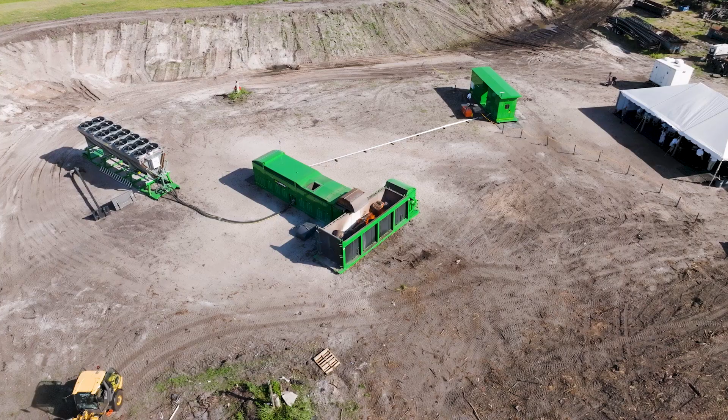So I founded this company 28 years ago, and as you can see by this cute little chart on either side of me, we've got machines on every continent on Earth except Antarctica. Building the BioCharger took a fairly large team. Our serious engineering team, which you'll meet in a little bit. But in addition to that, we have some other collaborators.

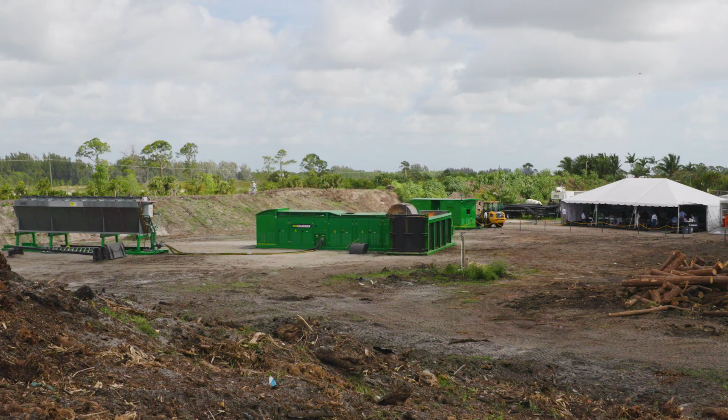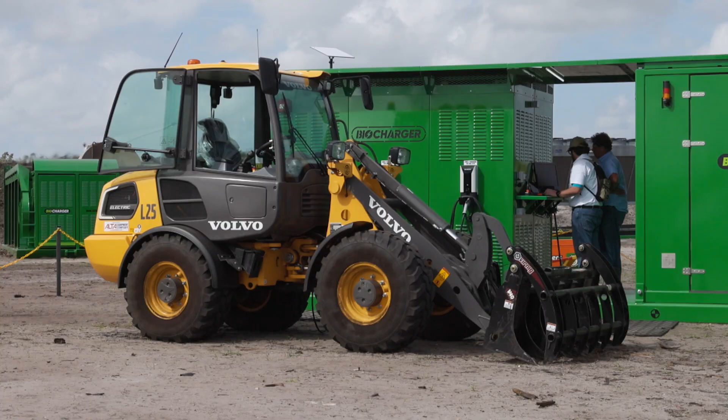We have Rolls-Royce. Rolls-Royce is building the battery for us. We have our friends at ElectraTherm. And ElectraTherm builds our organic Rankine cycle generator, which is really important. And then we've got Volvo, and they are advising us on this whole world of change into electric vehicles.

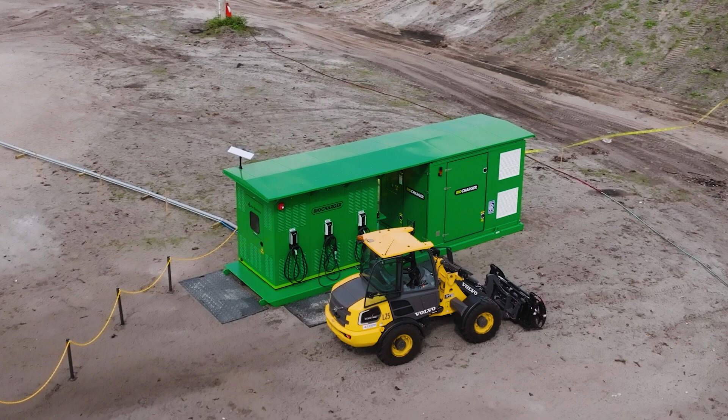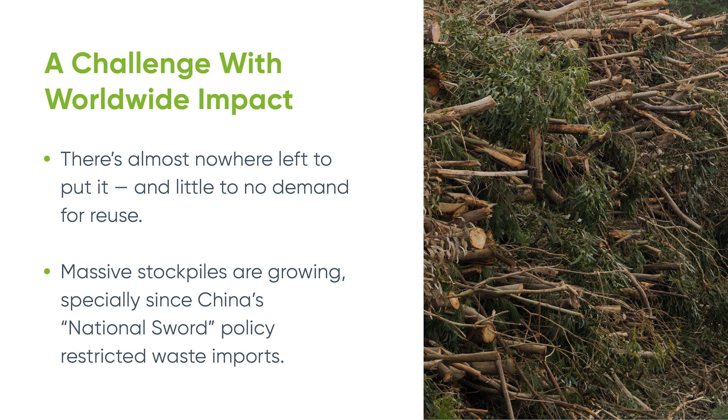You'll see we have the spectacular L25 battery-powered machine that's running out there. You'll notice on the battery storage module, we have the plugins to charge the machine up. It's been here running all week. It's absolutely spectacular. We're going to talk a lot about vegetative waste because that's our business. And it's an important topic because we have huge quantities of it as a waste, and we have no use for it, and we have no place for it.

But the problem is that 50 million tons doesn't include any of the vegetative waste from wildfire mitigation. It doesn't include tree mortality. It doesn't include our waste from our state and national parks. And it doesn't include any agricultural waste like the vineyards as an example, or prunings of trees and all that sort of stuff.

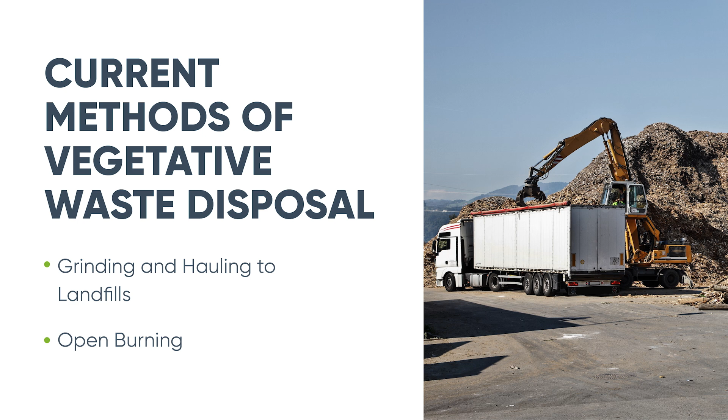We have this across Canada, Mexico, South America, Europe. I mean, you wouldn't believe. It's just absolutely amazing. How is vegetative waste being eliminated today? Primarily, we grind it and we haul it to a landfill, and we also open burn it. The problem with grinding and hauling is that a grinder doesn't eliminate vegetative waste, it just changes the volume, so it makes it easier to throw in a truck, right?

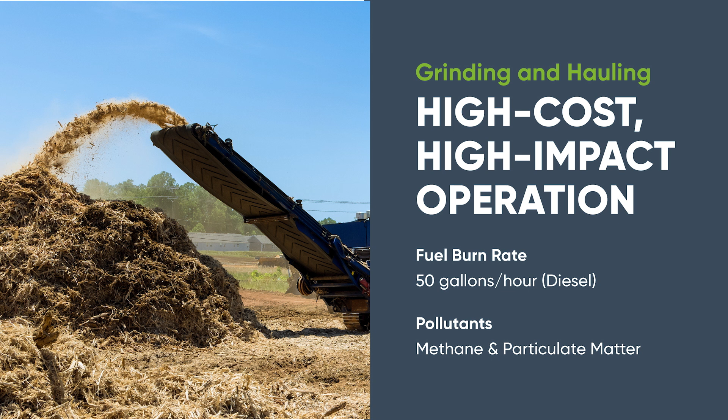But the grinders use anywhere from 50 to 75 gallons of diesel fuel an hour, and on top of that, there's this huge particulate matter release, which is a really important deal. We don't want this particulate matter in our atmosphere. That's the whole point of our machines. But even more important is that raw wood waste, as identified by the US EPA, is a carcinogen. So we have to be really careful.

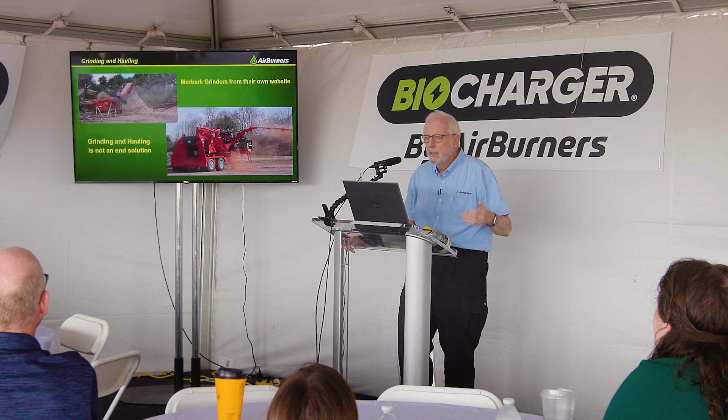I actually think grinders are incredible machines. One of the best companies in the world, I think, and I'm proud they're an American company, is Morbark. They do a beautiful job. They build an incredible machine, but these pictures are off their website. You can see the dust coming off of these machines. There's nothing you can do when you grind this up. You're going to get this light particulate matter, and a lot of this gets past our natural body defenses and gets in our lungs. And of course, that's the stuff that hurts us.

We've got to get back to a healthy forest, that's the whole point. And we're part of doing that. So how do we do that? We use a technology called air curtain technology. So what you see happening out there or in any of our fireboxes is that we're putting a curtain of air over the top of the firebox, and that curtain of air traps the smoke particles as they rise up on the hot gases and they reburn.

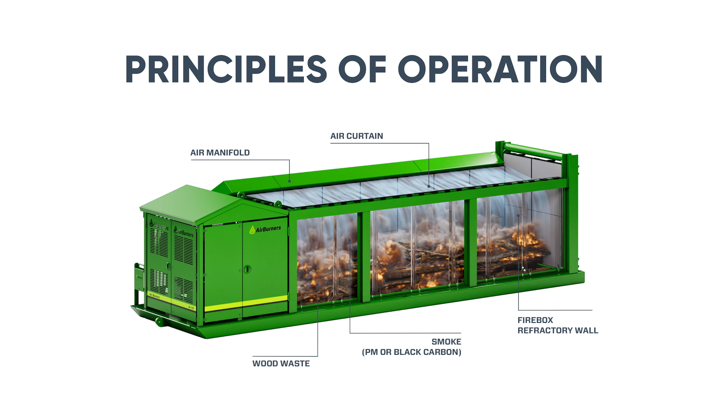So the purpose of an air curtain is to create a secondary burn chamber, basically. So the particles rise up, they stall under the air curtain for fractions of a second. It's the hottest part of the machine. They reburn and then they escape.

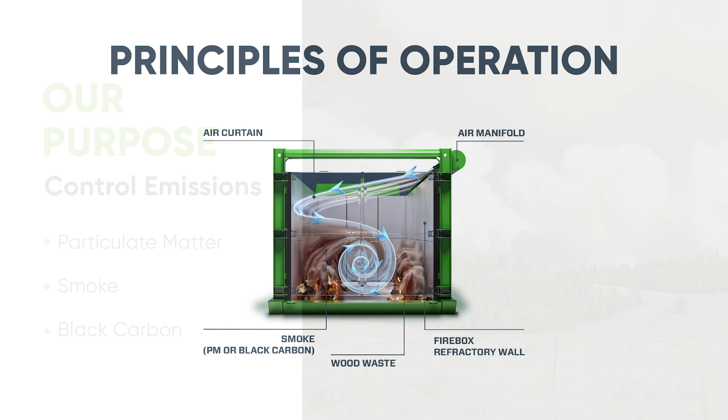This technology has been tested by people overseas and all kinds of agencies in the United States. We were really honored that we had a cooperative research and development agreement with the United States EPA. We're one of only 40 companies that have ever been offered that in the history of the US EPA. So that was exciting.

And we were a CRADA partner with them for 7 years. So it was great because we got to use a lot of their engineers and scientists. We did a lot of training with them, and it was a great time to be able to learn and to try things.

So our friends up in Environment Canada, as you might know, in British Columbia, that's a big hydroelectric facility. They have lots of deep valleys and they have a lot of reservoirs. One of their problems is all the floating logs get in the intakes, and so they've got to clean them out. And so they were open burning them for years, and they said, let's try these air curtain burners. And they took a couple of shots, and I think these next two pictures really underscore what our machines are about.

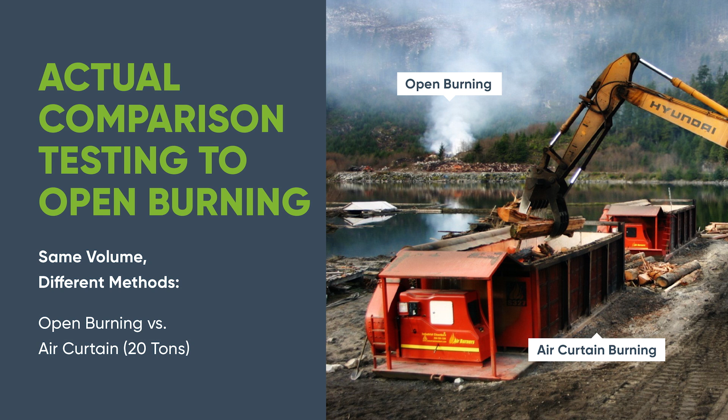So you can see in this picture that they gave us 20 tons of vegetative waste, or logs basically, and they had 20 tons across the river, and they said, okay, stopwatch, go. And they started burning the 20 tons, open burning, as you can see, and we put 10 tons each in the 2 fireboxes. You can see they're both burning right there. It's fairly clean, so you would say, okay, that's pretty good. But the real success is right here. In 1 hour, we eliminated 20 tons of vegetative waste down to ash.

That open burn across the way burned for the next 2 days straight and emitted this kind of particulate into that valley for 24 hours a day, 2 whole days. This is really where our machines excel. If you look down in the small bit, you can see we have a little bit of smoke from ours, but 1 hour and it's gone, 48 hours, and it's still not gone over an open burning. So our machines are much lower cost and they're much faster, even compared to open burning.

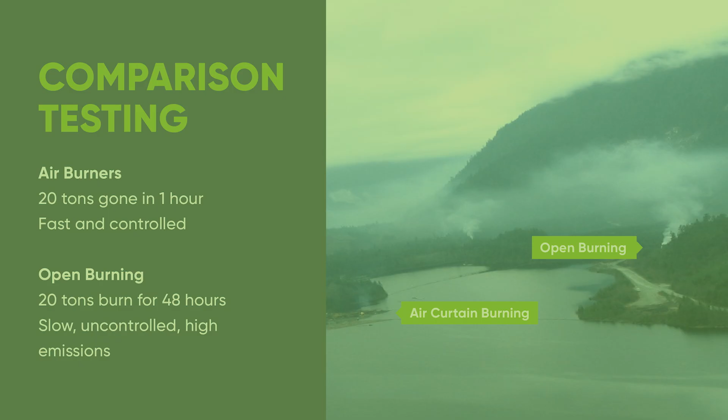BioCharger, an entirely new approach to biomass energy. It can be a revenue source. Taking vegetative waste in, you're making electricity. Electricity can be used or sold. It can replace diesel fuel, run these nice looking electric vehicles. We've got high throughput, like I've been mentioning. We don't need any supplemental fuels. The stuff burns naturally in the firebox. You don't see our guys out here lighting diesel fuel or something like that.

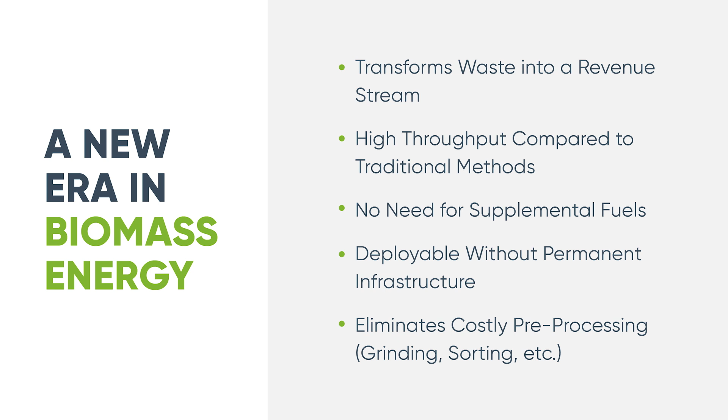The other beauty is there's no permanent structures. You can drop it right in the middle of a forest, or you can drop it here in the middle of a land clearing job, and in addition, we don't require any pre-processing like grinding. In fact, just the opposite. We can't burn wood chips. We have to burn the whole logs, or branches, or whatever they are.

But I said I was going to talk about the biomass incineration of today. This is what the typical biomass incinerator today looks like. We cut down a tree for some reason, land clearing something. We throw it into a whole log grinder, burning 50, 75 gallons of diesel fuel an hour. We throw it in a truck. There are no biomass incinerators today that can handle the throughput from a whole log grinder, because as some of you that use grinders know, they're not chips, they're fairly big chunks that come out. And they don't work in today's biomass incinerators, and that's why I was talking about technology needs to upgrade.

So then it has to go through a chipper to make it a particular size, much smaller. But now the difficulty is that you've taken a perfectly burnable product and you've turned it into small chips, which don't burn. So you convey it into a biomass incineration plant. You have to now add somewhere between 10 and 20% of supplemental fuel. It's usually either natural gas or propane. And this is what we eliminate in our biomass incinerators.

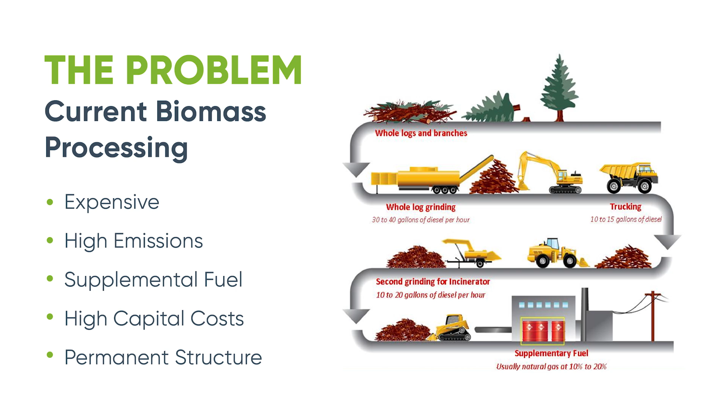This is the reason, if you go on DOE's websites or any of that, biomass electrical generation is something around 25 cents a kilowatt hour. It's just not palatable. Solar is down to 4 or 5 cents. Wind is down in the 4 or 5 cents range. Hydroelectric is down in the 2 cent range. So making it for 25 cents or 24 cents just doesn't do it. So if we're going to continue to use biomass incineration, which I think we should, we need new technology for the incinerators. Along comes the BioCharger.

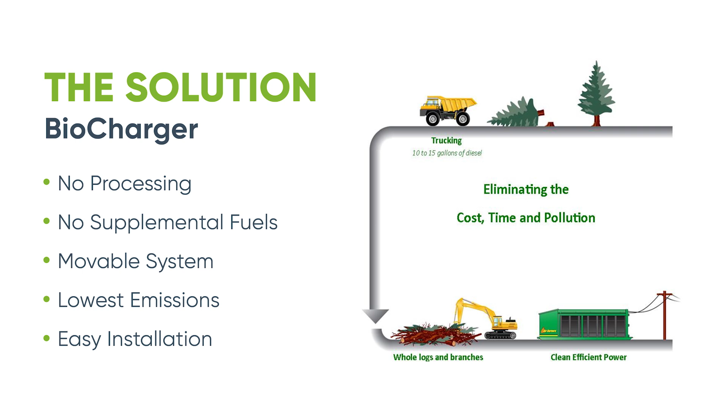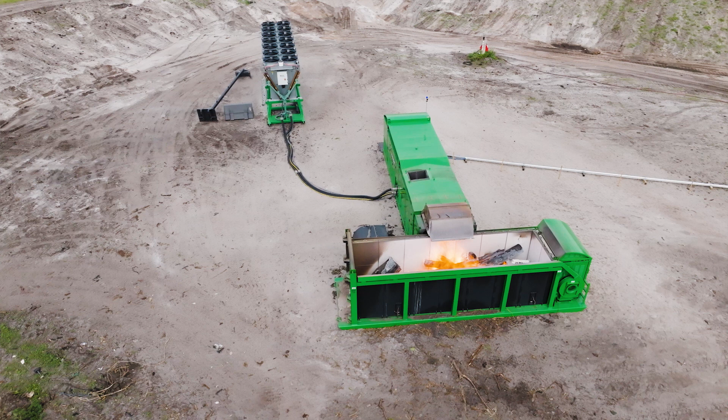Of course, our application is a little more specific, but for us, it's grab the tree, throw it in the top of the firebox, we burn it up, and you make electricity, and that's all there is to it. And so there's no processing required, there's no supplemental fuels. We can move this stuff around real easily. It's not a permanent facility. All the positives about it.

So I'm Dr. Ray Gallant. I'm with Volvo Corporate. So out of Shippensburg, Pennsylvania is where I work and play every day. My title is VP Sustainability and Productivity Services. So it's my pleasure to be here to talk to you today because I'm in the sustainability field.

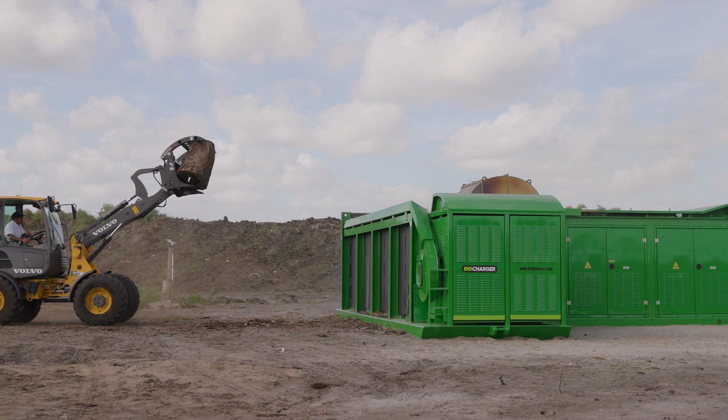And one of the really important things about the system we're demonstrating today is it takes care of two different problems. So it takes care of the emissions from machines working on site through electric machines and gives them a way to charge it on site where you don't necessarily have a grid connection. And it takes care of the bio waste that Brian was just talking about. So you have a circular system that's taking care of two different problems in one here in this demonstration.

So if we look at the U.S. in general and zoom out a little bit, the U.S., believe it or not, we produce about 7.25 billion tons of greenhouse gases every year out of U.S. sources. That's a lot of greenhouse gases. When you take the weight of a gas, we consider it zero in our lay thinking. But there's a lot of weight there. There's a lot of gas. There's a lot of volume going up in the atmosphere from different sources.

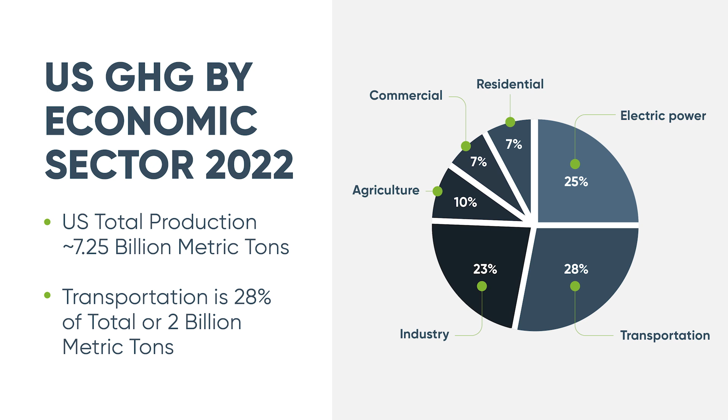Transportation as a segment is 28% of that. So again, 7 billion tons, 28% transportation. That's 2 billion tons of greenhouse gases coming out. And if you think about transportation, what is that? It's basically diesel and gasoline in your cars, your pickup trucks, your machines that you're running. So that's what's polluting our atmosphere.

If you take a look at the transportation, break it down a little bit further, 80% of it is in trucking and your cars, okay? So we're taking steps to eliminate that. You've all seen the EV revolution that we're going through, not as fast as some of us would like, but it's still starting to catch on, starting to change the dynamic in the industry. Trucks are going the same way, and eventually machines are going the same way.

Machines, we happen to be in the other construction or other sources, and we make up about 2/3 of that 6%. Again, 4% of the transportation industry may not seem like much, but when you start talking millions of tons, it's still pretty significant. If you look at our sources of gas coming out of these petroleum fuels, most of it is carbon dioxide. So you hear a lot of talk about some of the sources is nitrous oxides they're worried about, or it's methane they're worried about.

In our case, 97-98% is straight carbon dioxide out of the tailpipe. There are some nitrous oxides. We are concerned with those. We do treat for those, but the majority of it is coming straight out of the tailpipe.

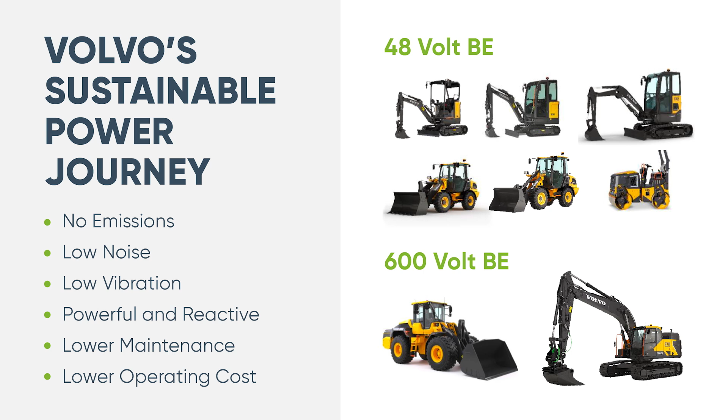Lower maintenance. Most of our maintenance schedules are changing fluids, changing air filters and stuff, monitoring and fixing that diesel engine that had a huge number of moving parts that constantly had to be lubricated and wear. Electric motors, that's not the case. Basically, an electric motor has 2 moving parts, and that's the bearing at either end of the shaft. And there's no other contact in an electric motor. It's all electric fields. Lower vibration.

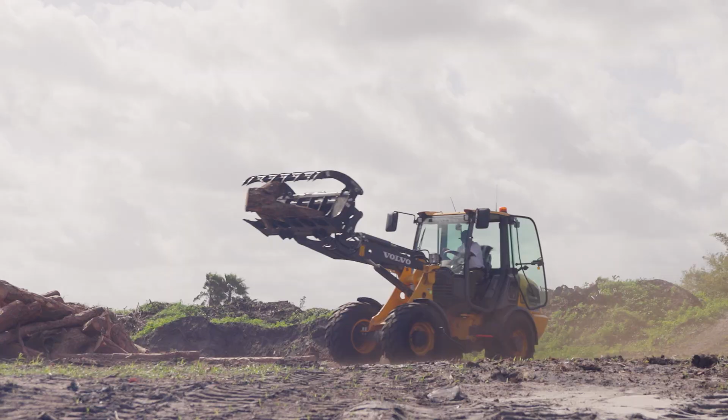This is, again, a big deal to the operators, because when they're operating a diesel machine with a diesel engine 2 feet in back of you, you feel those vibrations at the end of the day. Plus, on sensitive job sites, you can't have those vibrations on the job site. So if you're working in livestock, for instance, the animals get spooked if there's vibrations and noise.

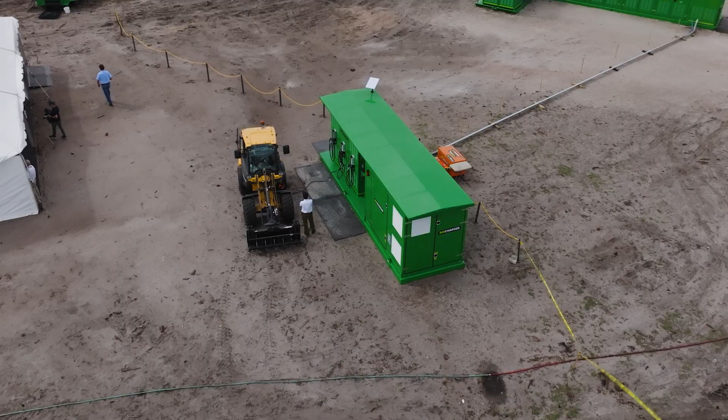With these machines, we go right up next to the animals. We have one working in a zoo, and they love it because they can go into the free-range pens with the animals and just do their work. Normally, the animals would stampede away from a diesel machine. So there's an advantage there.

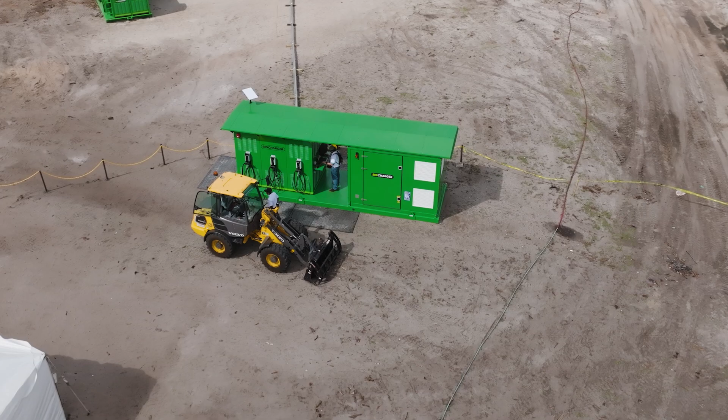But if we're going to produce electric machines, one of the things we've got to pay attention to is how are you going to charge it? And really the demonstration today answers that question. So if you're fortunate enough, which about 30% of our job sites are, to have grid power, you can get a commercial charger, hook up to grid power, convert from AC to DC, and charge the machines.

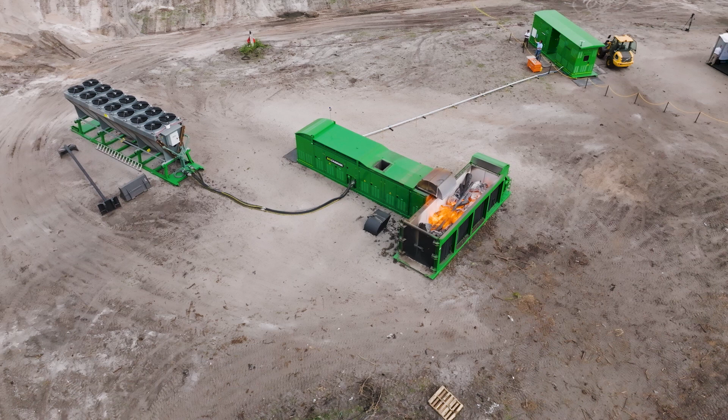If that fails, you have to bring the electricity to the machine. So that's basically a portable fuel tank: you load up a battery on a trailer or on a truck, load it up with electrons, take it to the machine, dump the electrons into the machine, that's its fuel. And finally, if neither of those solutions are available, you can go to a system like the BioCharger that we're demonstrating today, which we call an on-site generation system.

And that's the beauty of this. You're generating the electricity, you're taking that electricity, using it in the machine. It's all a circular system, it's all self-contained. You're getting rid of the waste that you would have put a lot of diesel fuel into getting rid of, as Brian was just mentioning, or you would have left it on site to rot and create a wildfire hazard. So this is a good way to not only capture it, but to lower your costs in the overall circular nature of it.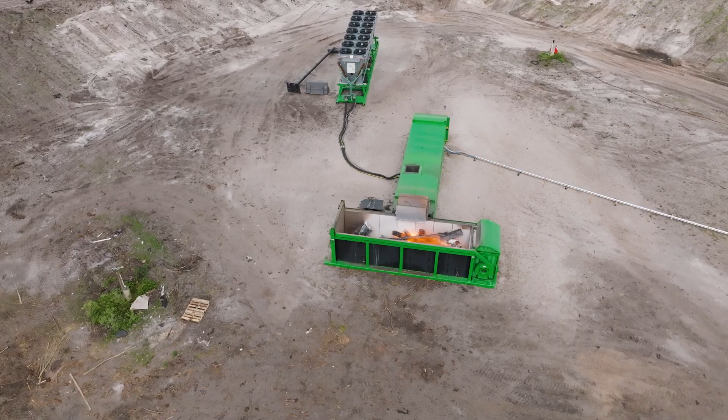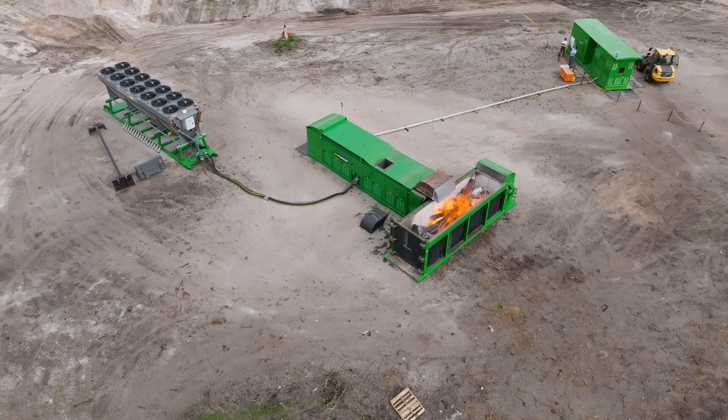So, BioCharger. You'll see 4 pieces out here. There's a firebox where we're burning up the vegetative waste. Connected to that is a power module. In the power module, we take the heat and we run it through some systems into an organic Rankine cycle generator. We make electricity. We send that into the battery storage module. The battery storage module is designed to be able to connect to these electric vehicles.

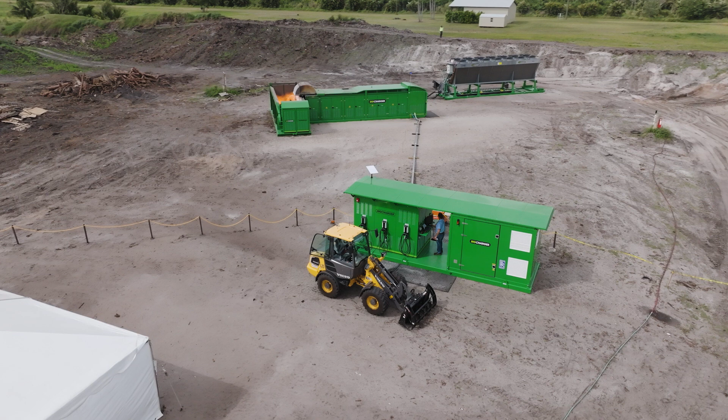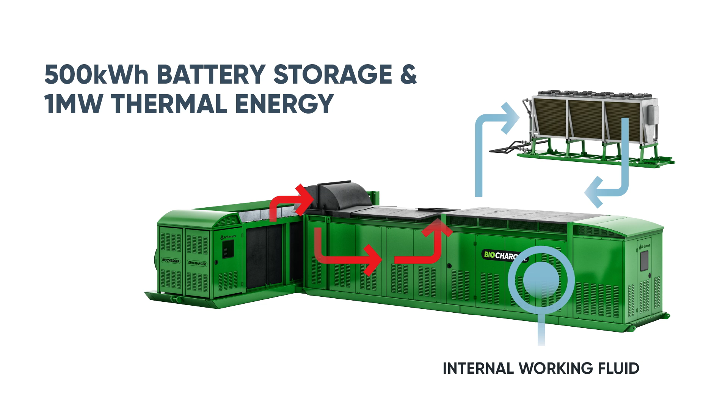Also, you'll see inside there's 120 volts where we can plug in things like your radios and cell phones and whatever else you happen to have on site that might need to be recharged. And then we have a cooling module. Basically, the heat in the red arrows comes out of the firebox and then goes out of the top. This will be important in a minute.

I'm going to show you some of the things we're considering for the future. So we pull in the heat from the burning and we exhaust it out the top. When it comes into the power module, we then have a heat exchanger and we exchange it to a closed loop water cycle system. So in all of our systems inside here, we have the one gas loop and then we have 3 fluid systems.

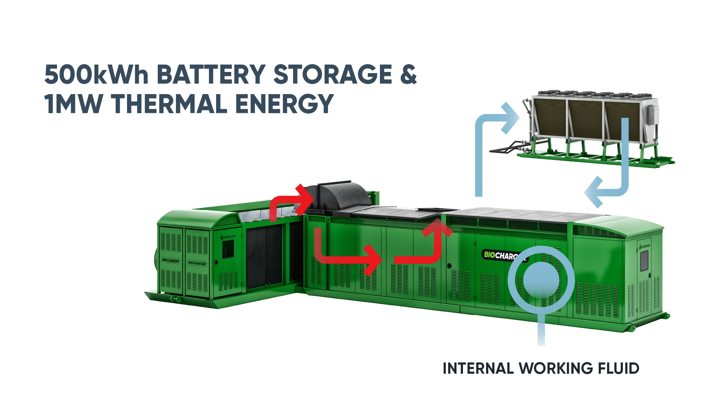They're all what we call closed loop systems. So we don't consume any of the fluids in there and we don't release any of the fluids, so they don't ever need to be topped off, right? And they're predominantly water. So in the bottom line, you'll see we then collect that heat, we transfer it to the water, we take it down to the ORC.

In the ORC, there is another heat exchanger and there's working fluid in the ORC. So we basically vaporize the working fluid in the ORC. That spins a small expander, and then we take that vaporized fluid and then through the other fluid system you see in the top to the cooling module, we condense that working fluid back down to a liquid. So each of these cycles is just that, a continuous cycle.

So the hot gas comes in and exhausts out the top. We got water that runs back and forth to the ORC that brings the heat to the ORC. That heat is exchanged to the working fluid. The working fluid then vaporizes. That's our working force, and that spins our little generator. And then we run a cooling system from the cooling module to then take that working fluid and make it a liquid again, take it from a vapor back to a liquid.

So we built a few of these systems. This is the first BioCharger with the battery storage module, but we have another system called the PG Firebox, which is fundamentally the same except it connects to the grid. And here's just a few shots of us assembling one of these systems out in, I think, California.

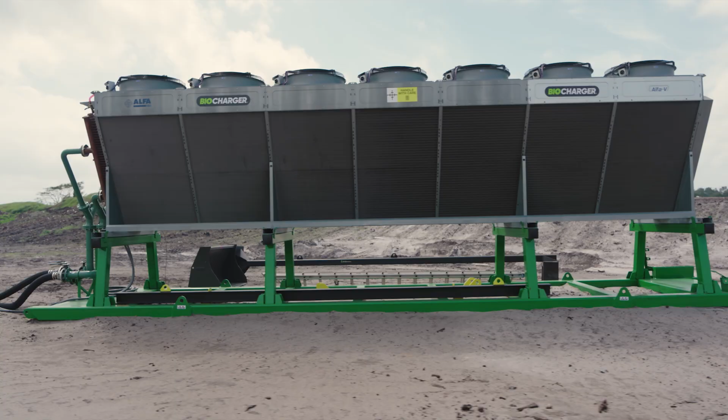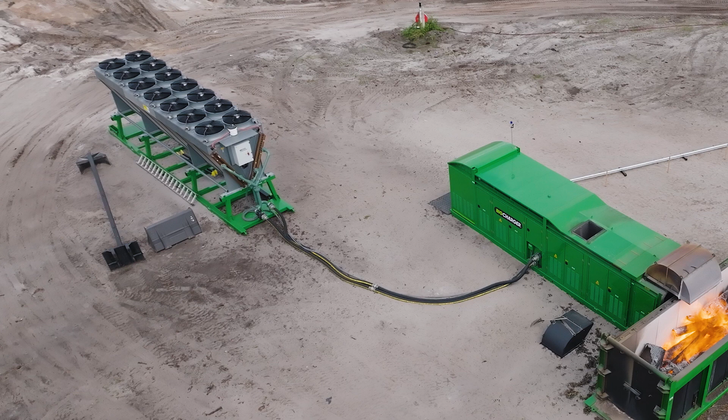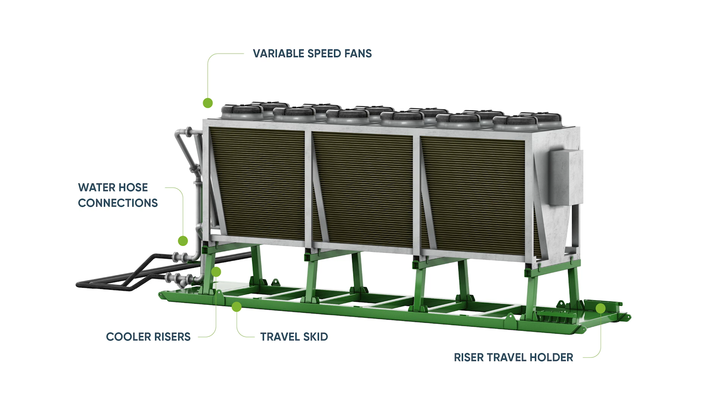The only one that has to be assembled, so to speak, on site is the cooling module. So we have to pull the silver heat exchanger, set it on the ground, put the 4 sawhorses up, and then set the cooling module back on the top. There's a single bolt in each of those, and then we literally plug in the cords, and away we go. As you can see, it's a fairly easy thing to move around and set up. As I was saying, with the cooling module, we have those risers and everything that's required to assemble and use the cooling module packages up on this travel skid.

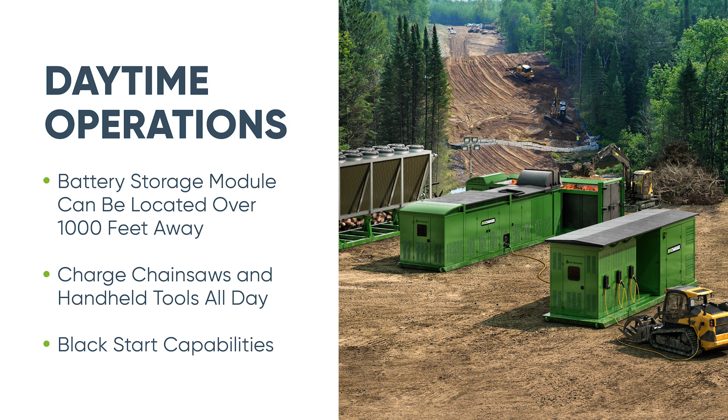The battery storage module, as the name says, we got a big battery in there. We have some conditioning electronics in here so that we can come out with 220 volt, 400 volt, 120 volt, whatever we need, so we can do some charging. Generally speaking, you would have this machine at a site. Whether it's in the forest or land clearing, you would run all day, get rid of your waste, you charge up your battery, and then you bring all your equipment around in the nighttime, plug it in.

The other thing is that Ray mentioned the portable batteries. Good place to charge the portable battery. You can bring the portable battery, charge it up, and then you can run it down the road maybe 10 miles and charge some other electric equipment.

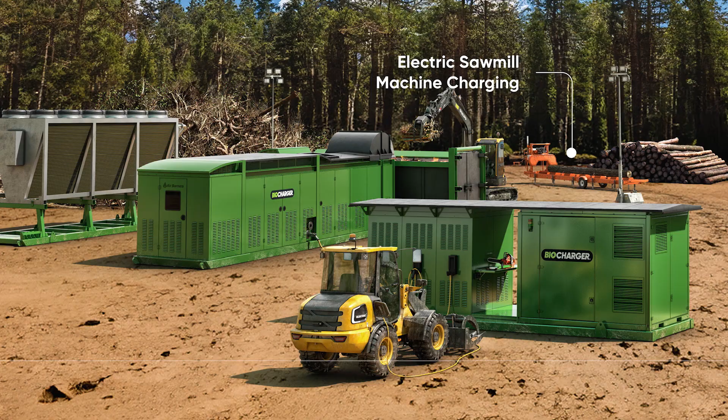I'd like to finish up by talking just a few minutes about the future. Where can things like this go? Well, I think it could go a place like this. We're making electricity. We've got electric vehicles there. We're charging them. We have an electric sawmill. So now we're making boards. Nate and the gang at the Forest Service are trying to work hard on programs for forest utilization, so we can, as close as possible, bring materials out of the forest into market. All right. So I think we can do that.

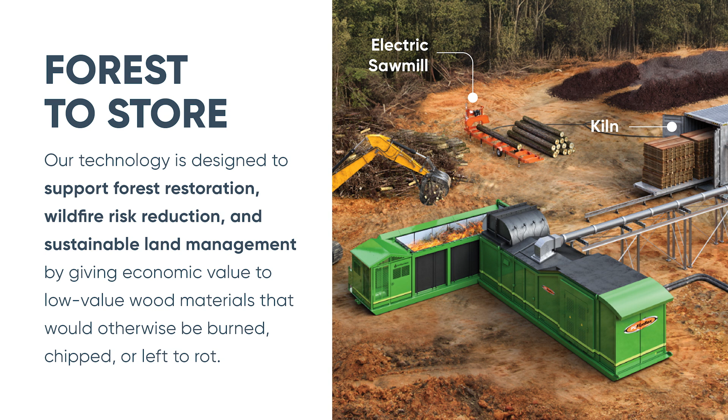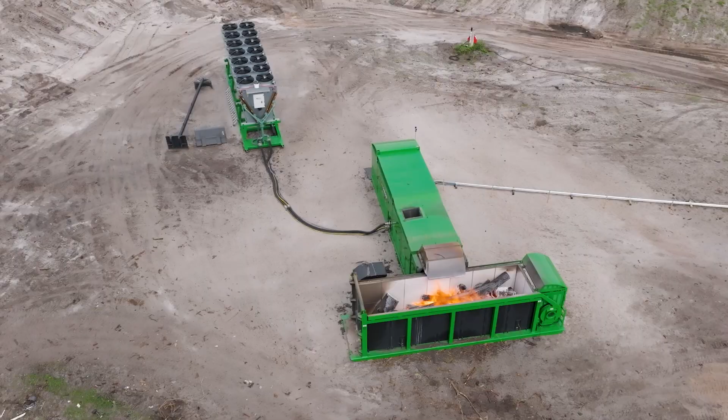We could have it cut with an electric mill. We can kiln dry it. We can load it on a truck, and we can take it straight to Home Depot. Nothing else in between. And that's kind of cool. Certainly lowers the price of a piece of lumber and offers other job opportunities and a place for a lot of what would be waste materials. I think that will easily be our future.